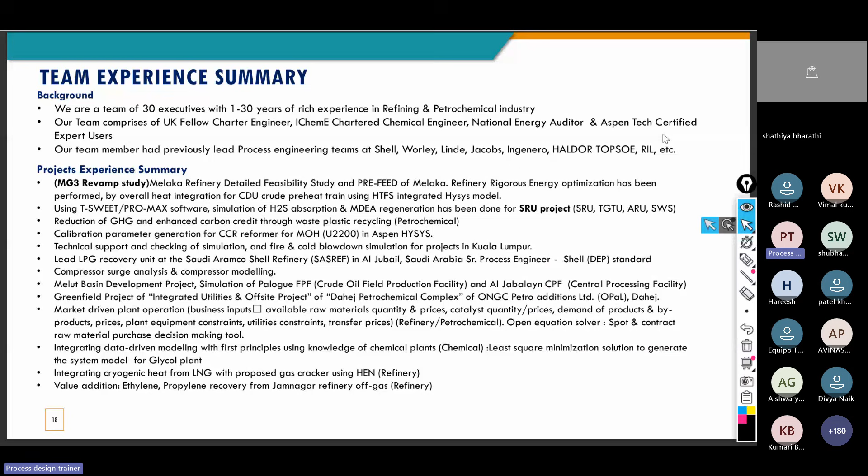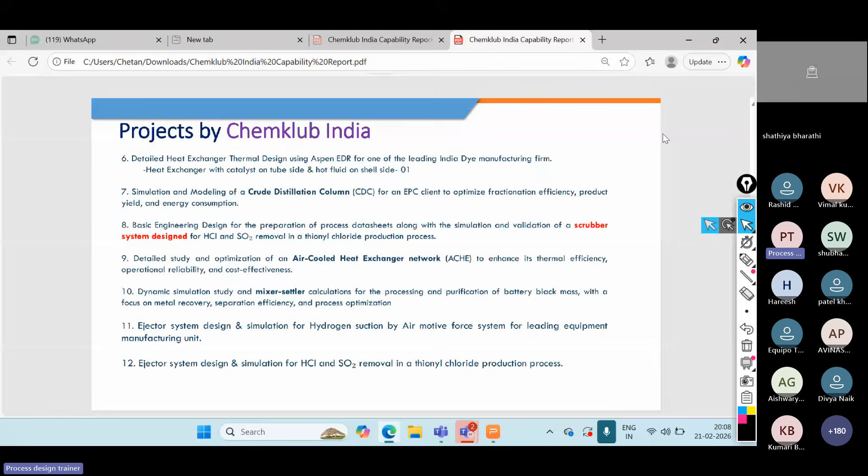Let us now start with our today's webinar, which is on pressure safety valves.

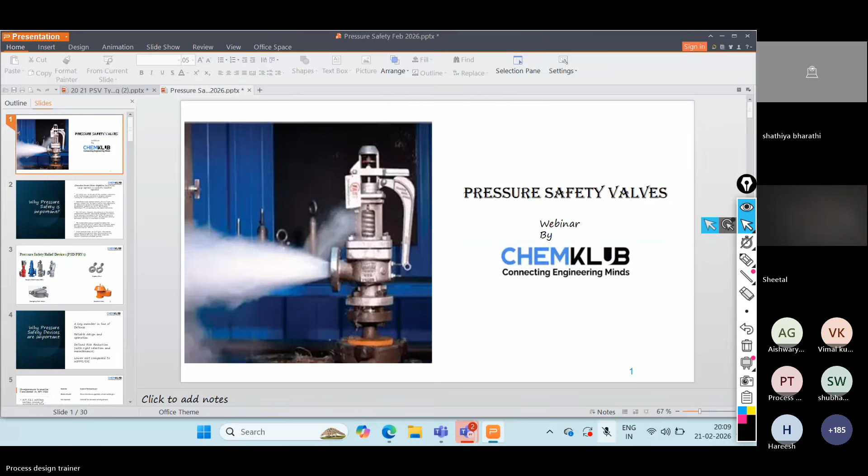Thank you. So at 2:17 p.m., the pressure set point of the batch reactor was adjusted to 12 psi. In the US they use psi; in India or Asia we use the bar system. They use the psi system. So 12 psi was the intended pressure, and the temperature set point was 300 Fahrenheit - again, it's an FPS system, foot-pound-second system. So 300 Fahrenheit was the temperature set point. This was the situation at 2:17 p.m.

At 2:39 p.m., approximately 22 minutes later, pressure in the reactor exceeded the set point, increasing beyond 12 psi, and there were attempts to reduce it - stopping the heating, providing cooling. Those attempts were made, and even so, the pressure safety valve opened at 2:54 p.m., which is 15 minutes after crossing that pressure.

We know the hierarchy of process control is: we first try to maintain temperature by means of interlocks or logic, and if it fails, then the pressure safety valve comes into picture. So at 2:54 p.m. the pressure relief valve opened. As expected, the pressure initially decreased, but after releasing some material, the pressure again started to increase. The temperature also increased, reaching 385 Fahrenheit.

So it is possible that the size of the PSV was not adequate, and that is why when it pressurized, it popped up and relieved some pressure, but it was not sufficient to release the entire pressure being generated, maybe because of uncontrolled heating. So the causes may be multiple.

We will see what are the causes of overpressure in the slides to come. But to conclude here, maybe the heating rate was so high that the PSV was undersized. There may have also been thermal decomposition leading to generation of excess gases inside the reactor, for which the PSV was not sized. So the possible cause in this case is that the PSV is undersized.

So even if you have a PSV on a reactor, it is not protected unless you have a properly sized PSV. So the focus of today's webinar is to give you some background on PSV: what the device is all about, what are its types, and a case study at the end to demonstrate how a PSV is selected. When we say selected, why we say selected and not designed, we are going to look at that in the slides to come.

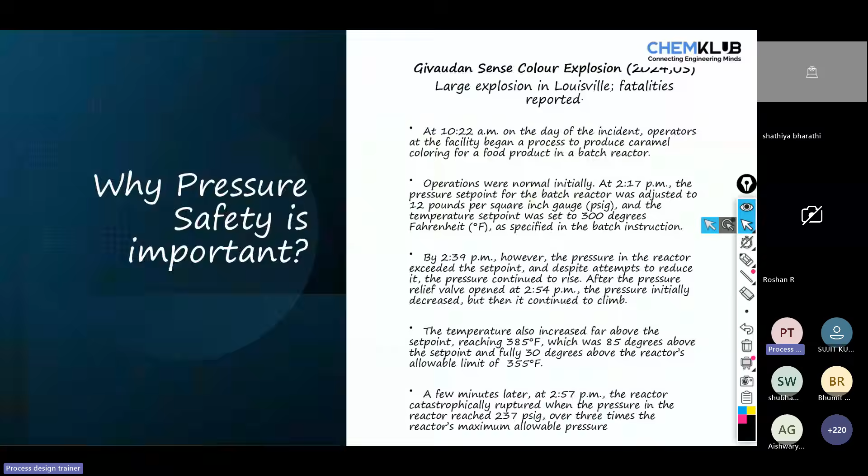A question again, we will keep this an engaging session and not a one-way communication. So another question is, what do you think is the difference between a pressure relief valve and a pressure safety valve?

Pressure relief valves relieve liquid, and pressure safety valves relieve gases and vapors. Pressure safety valves directly open, while PRVs gradually open when pressure is increased. So both points are correct: pressure relief valve is generally used for liquids, and pressure safety valve is used for gas purposes only.

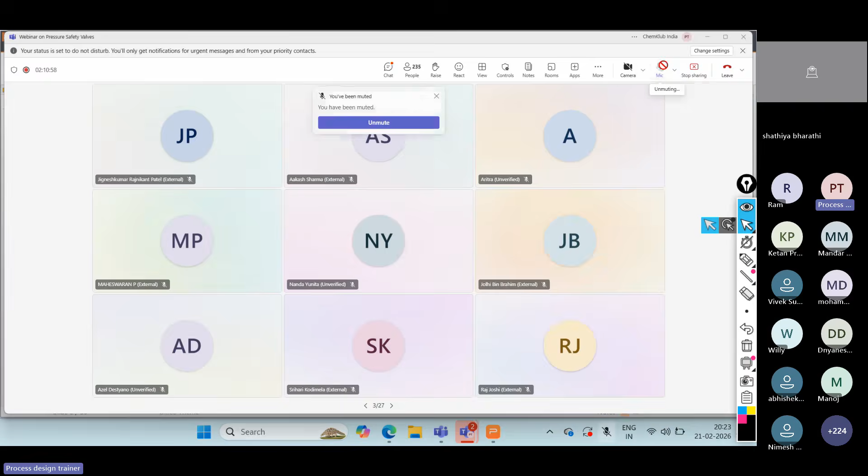You're on mute, can't hear you. Your mic is muted. Sir, your mic is off. Why does this happen? This keeps happening maybe after 10 minutes. So next time also give me the same reminder.

So I think I was talking about the difference between forward acting and reverse buckling. Forward acting rupture discs are general and used when the difference between operating and burst pressure is large, while reverse buckling is used when the operating and burst pressure are very close to each other and there can be a spike. My mic is on, right?

Yes, sir, audible. Yes, sir.

When the operating and burst pressure are quite close to each other, we use the reverse buckling disc so that spikes or pressure fluctuations do not rupture the disc, because in forward acting discs there have been many cases of premature rupture. With reverse buckling, because of its shape, it absorbs some of the shocks and does not prematurely rupture. So the point of selection is generally when operating to burst pressure ratio is more than 0.9, you go for a reverse buckling rupture disc. Otherwise, you can use forward acting.

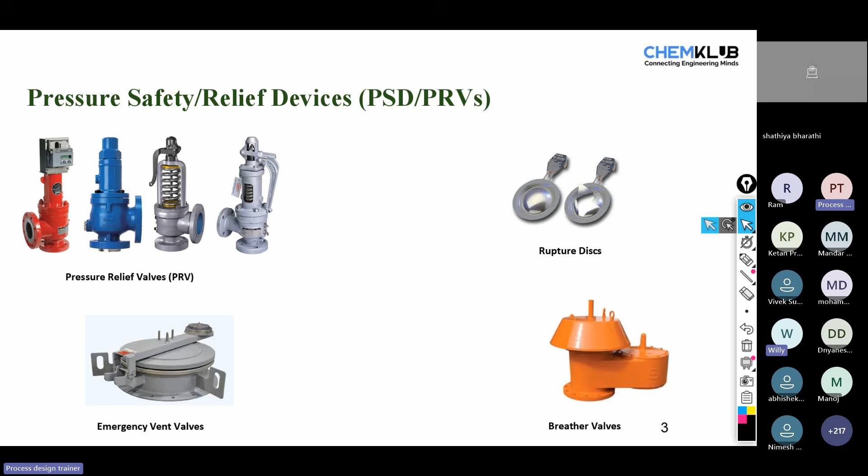Let's move ahead. Why are pressure safety devices important? As we know, there are many instances where reactors or equipment are under pressure in normal operation, or they can be subjected to pressure because of process deviations. To prevent rupture, there are a few options, like you can have an interlock or a safety relief device. These are generally the two choices.

Comparing both, if your plant is not a very hi-fi plant and you don't already have an SIS system in place, the best option is to have a PSV or a rupture disc, or a combination of both. That's why pressure safety devices are important for reducing the risk of explosion, inventory loss, and incidents. They are quite reliable.

In general, it is said that a PSV has a PFD of 1 into 10 to the power minus 2. So it is as good as a SIL 2 rated interlock, if it is selected and maintained in the expected manner. If you have a wrong selection, or do not maintain your PSV, it can malfunction and will not give you the required risk reduction.

It might lead to an incident if you have a frequent cause that causes overpressure of your system, and if your PSV does not act or the rupture disc does not burst, that might cause a big incident. That's why not only the right selection and right design, but also right maintenance and replacement are important when we talk about pressure safety devices. Their cost is lower compared to HIPPS.

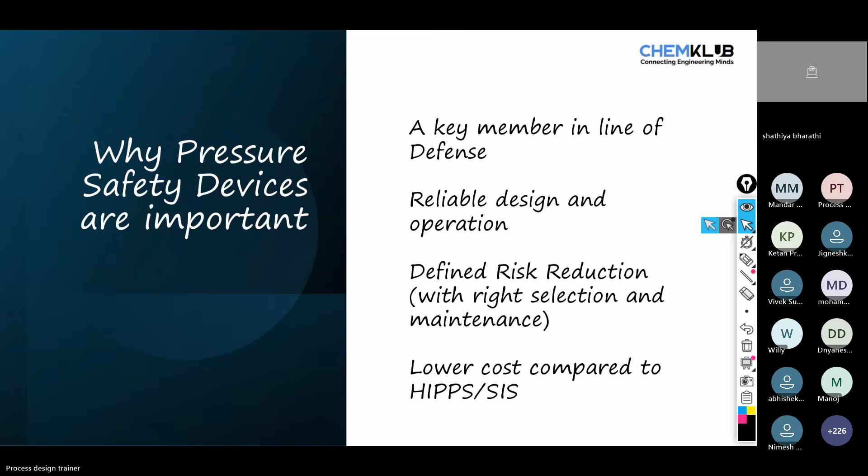Are you getting my point, sir? Hello? Hello, sir, you are not audible. I got muted again, I'm sorry.

I got your question. You want to ask that you have a system where you want to take pressure and vacuum both in different batches. In one batch, maybe it's under pressure, in another maybe under vacuum.

In that case, if you want to go only with the rupture disk, you have to talk to the vendor that this rupture disk is going to get subjected to full vacuum in some cycles. But then there are limitations from the vendor, vacuum limitations are there, meaning all rupture discs cannot operate down to 50 torr itself, they have a range, something like 600 or 500. So in that case, how do we proceed? Meaning whether we need to take two rupture discs and an isolation valve, or how it should be done.

No, taking two rupture disks is not the solution. Ideally, because you are having a system which can be subjected to pressure, you should use a PSV rather than a rupture disk, because you want to also cater for vacuum.

This is one option. Second option, if you are having the problem that PSV selection is difficult because the material is corrosive, I need a rupture disk on the upstream of the safety valve.

In the pressure case, what you can do is change your control mechanism when you are changing from pressure to vacuum. So when you are going for a vacuum process in the same reactor, you can isolate the rupture disk nozzle because you do not require it in that batch.

This admin control is okay to have. Understood - means only at the time of changing the recipe, we can have a control of the mechanical valves itself, or we can see an on-off lock valve, you can lock it.

No, an on-off valve is not the right choice, because if you have an on-off valve, due to failure of those on-off valves, your devices can go isolated in your required case also. For example, you are operating a pressure batch - if you install an on-off valve which is air operated, now it is air-to-open, and if the air to that particular valve fails, it will close and isolate your process safety devices. So that is not allowed.

You have to do it manually in that case. We are having the option of a lock valve also - a valve locking system, manual locked valves. Thank you, sir, understood.

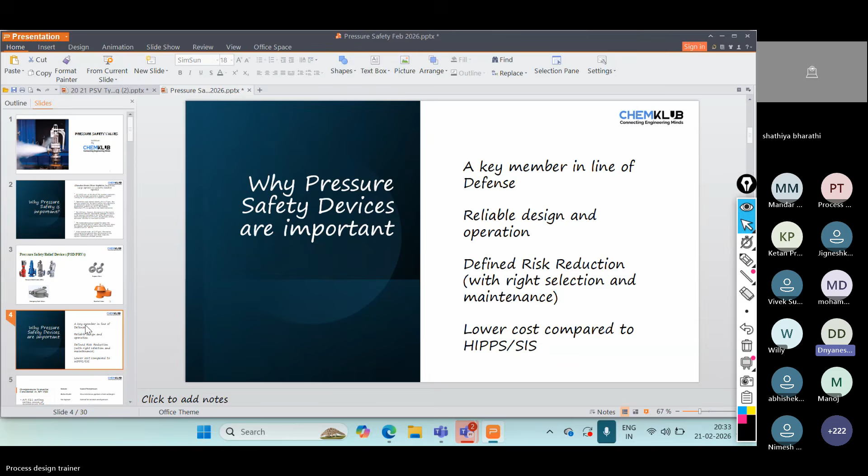Wait, now let us complete the presentation first. I will, it is just in continuation of this discussion - can we use a PVRV in this case?

So PVRV is a breather valve, right? Pressure vacuum relief valve. PVRV is a pressure vacuum relief valve, but it can in turn be connected to a nitrogen supply. I got your point.

But in this case, in my opinion, because he is already having a PSV, there is a requirement of a PSV at a higher pressure, right? So PVRV you cannot operate at 2 bar, 3 bar - it is in millibars, because it's a weight loading type mechanism.

PVRV can be used in a vacuum situation. In a pressurized situation, we have a PSV set at a certain pressure. But he wants to pull just vacuum inside the system. When he pulls vacuum, there will be air ingress from the vent port on the vacuum side. He wants the vacuum inside the system, but he also wants the rupture disk, which is not suited for vacuum.

If you provide a PVRV, it will lift itself and allow air or nitrogen ingress inside, so he will not be able to pull the vacuum.

Just for information, we are using one torr vacuum in our plant and we are also using a rupture disk, but that rupture disk doesn't buckle up. There are suppliers who supply reverse buckling type rupture disks rated for full vacuum, but in his case maybe the MOC is such that, for example, you must be using a metallic rupture disc. Some rupture discs are made of graphite, so they are also not rated for full vacuum. We are using PFA coated discs.

If the PPT is shared, we are not able to see it. I'm sharing it, nobody is able to see it. It is visible, sir. Yeah, I can see it. It may be the internet connectivity, try to reconnect.

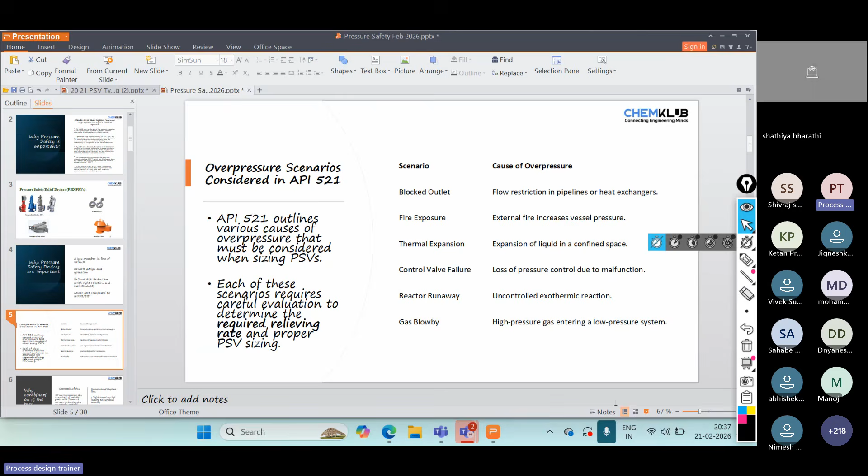So what to do when you have multiple scenarios? For example, for sizing a PSV, you have blocked outlet as well as fire exposure. This is a very common case where you can have both scenarios at the same time. So what will you do when you want to select a PSV suitable for blocked outlet as well as fire exposure?

What is the procedure or criteria for selection? Need to check which relief load is high, that one you select. In that case the orifice size is higher. Orifice size depends on the relieving rate. Relief load is relieving rate, right.

That's the right answer. Why? Because you can have different relieving rates at different pressures and different densities. In blocked outlet you might have a different density because the temperature is normal, but in fire case you might have a different density because it is under high temperature. So relieving rate is the right criteria, because for the same orifice size you might get different relieving rates based on different densities of the fluid, even though the set pressure is the same. So relieving rate is the criteria.

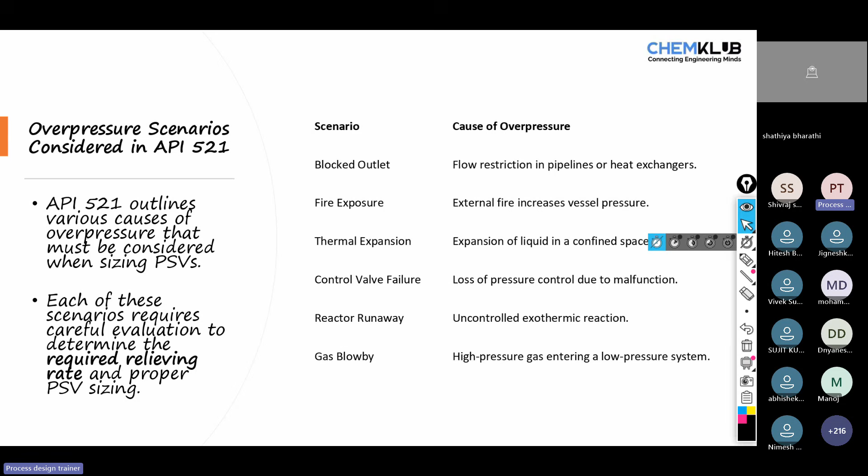Whenever you are choosing a safety valve, first you have to make sure that you have considered all the possible scenarios out of this list. And for the worst case relieving rate, you will select your pressure relief device, either rupture disc or PSV, or a combination of them.

Why is combination the best choice? There are certain drawbacks of PSV. PSVs come in direct contact with your process fluids. They are prone to corrosion due to contact of metallic parts with chemicals. They are prone to choking because it's a complex structure inside. They leak due to repeated working and erosion of soft seats.

So in case of toxic services, if they operate multiple times, you might have a situation that on the outlet side you have a small stream of material coming continuously. I have seen it in case of steam - you might also see in the plant that the PSV outlet is always releasing some steam because it's kind of leaked due to periodic strain on the parts. It is also costly if constructed from special materials - if you want to make it Hastelloy or alloy 20, it will be a very high cost. Am I audible?

Yes, yes, perfect sir. Yes, yes. Yes sir. Okay. Yes, yes, yes sir. Yes. Yes, you are. Okay.

So these are the drawbacks of PSV, but does the rupture disk take care of all the drawbacks? No. When the rupture disk opens, the worst part is it de-inventorizes everything. So if you have, say, an ammonia storage or ammonia reactor under pressure, autoclave with high pressure, big inventory - if the rupture disk is the sole pressure relief device and it ruptures and opens, the entire ammonia inside the reactor will be released to the atmosphere, causing toxic exposure to a lot of people in the surrounding area. It will be an offsite emergency. You do not want your chemical released to atmosphere. Even in many cases the material is costly, so it is also an economical loss for the organization.

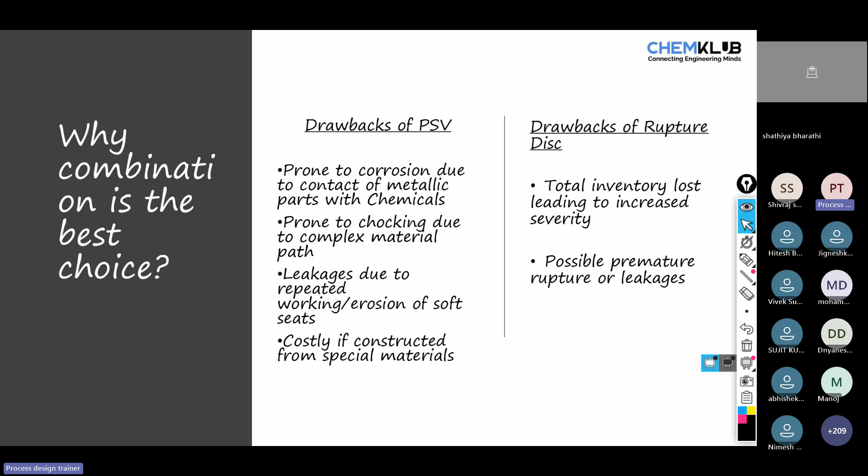The second advantage is you can use a pressure safety valve which is not very costly, because the rupture disk will prevent corrosive material from entering the PSV for a long period of time, and whenever there is a requirement, the rupture disk breaks only for that short period of time. The PSV will be exposed to those chemicals, but in that very short time it is not expected to get corroded and malfunction. This is the reason in many cases you must have seen a rupture disk followed by a PSV as a combination - they give the advantages of both equipments while discounting the disadvantages of both of them.

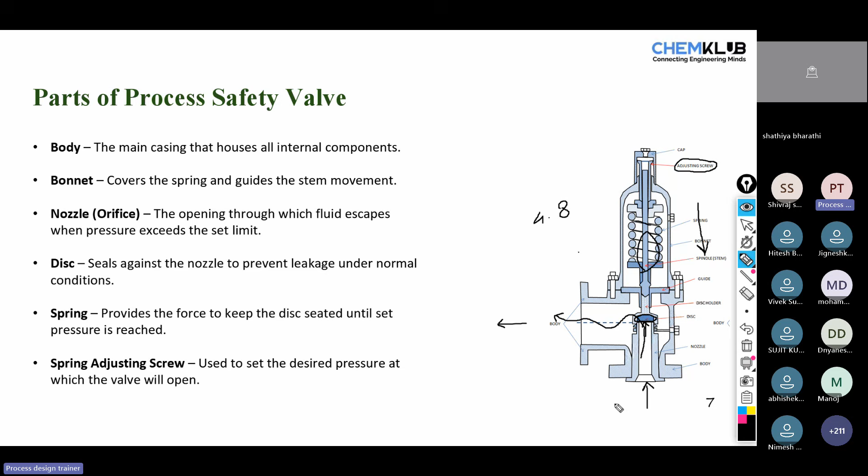So this is basically your overall construction of a pressure relief valve. Can somebody tell me which type this one is? Conventional PSV without bellows. Yeah, so this is a conventional PSV.

So what are the other two types? Pilot balance type and bellows based type. One is conventional, balance bellows, and pilot operated. Okay, so I will not go into this description totally.

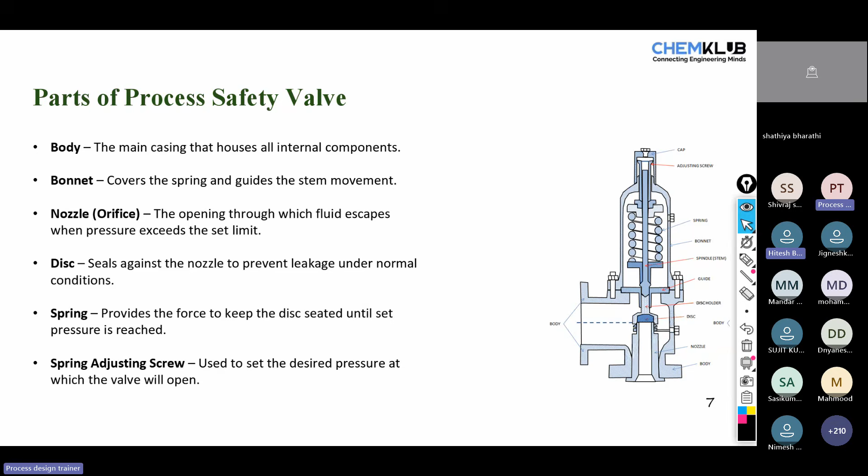Okay, what is the difference in the construction? The bellows are seated in the disc area to increase the back pressure tolerance. In conventional, the bellows are not provided. In bellows type PSVs, the bellows are provided for absorbing the pressure. And in pilot operated, a separate pilot is provided through which the internal pressure is absorbed, and through the system's pressure the PSV pilot operates, and after that the PSV moves into position according to the set point.

Okay, let us quickly go through this. I think most of you have told it correctly, but for those who do not know at all, let me go through it. So this is a conventional relief valve. You can see this is a nozzle and this is a disc set against it by means of this pressure. So when this PSV lifts, this bonnet - this is called the bonnet, where the spring is located - floods with the process fluid. Imagine this as a hollow cylinder in which you have a spring and a piece attached to it with a soft seat against the nozzle.

What happens when this lifts up? This has a smaller dimension compared to the bonnet - you can see the diameter is smaller compared to this diameter. So when this lifts, the process fluid enters this area. It also enters the bonnet, and it comes out from this outlet.

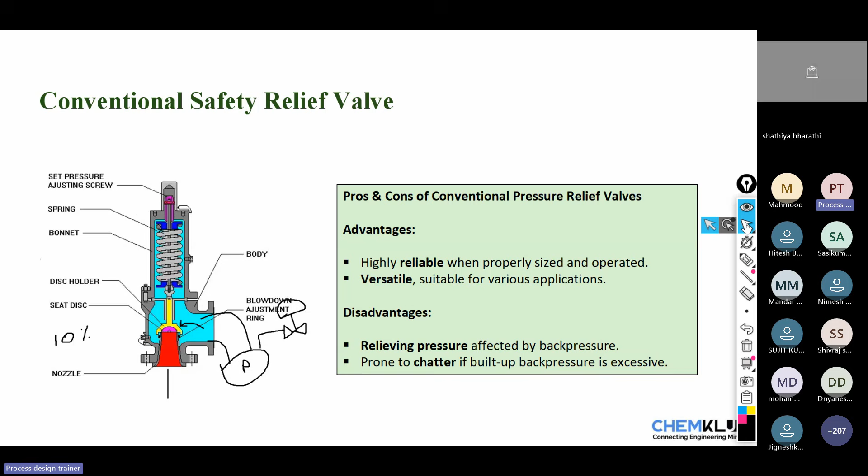Okay, okay, understood, thank you. I'm not sure why I'm not able to go ahead. Some problem with my system.

So the next type is balanced bellow. In balanced bellow, the relieving pressure is not affected by the back pressure. They can handle higher back pressure because there is a back pressure from the outlet side, but these bellows do not allow that entire back pressure to act on the seat. These bellows form a wall which prevents the outlet side from putting pressure directly on the seat, and that is why, up to a certain back pressure higher than conventional, they are allowed.

They also prevent the spring from corrosion. In conventional valves, when the process fluid enters, it goes all the way into the spring and then comes out, so these springs are exposed to the process fluid. In the balanced bellow type, they are not exposed because there is a diaphragm and a bellow which prevents direct contact of corrosive liquids or gases with the spring.

Now, question to all of you: there is a difference in construction at a point between this balanced bellow and the conventional one. What is that point of difference? Sir, I think we can't adjust the set pressure below it... we talked about the bellow, so that is the obvious difference from the name.

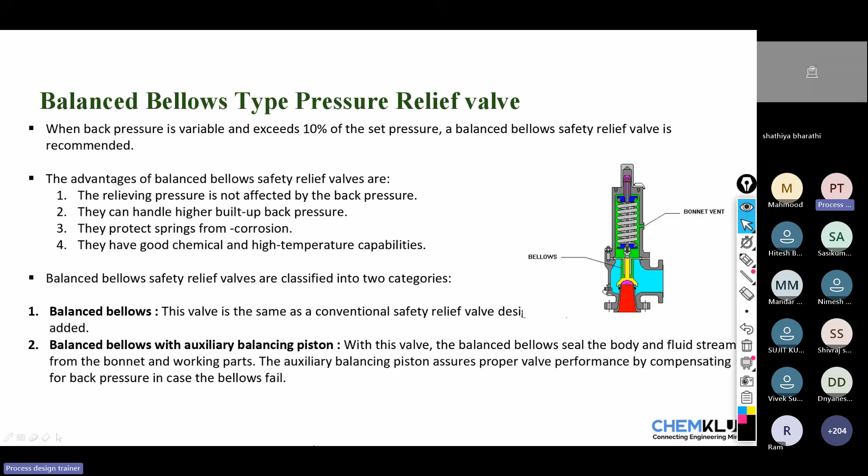My presentation is not working fine today. I'm not sure why. Yes, the balanced bellows... Sir, it's not visible. I'm not visible? Visible, sir. No, visible. Chat is visible. Yes, visible, visible. Okay, so if it's not visible for somebody, he might have to change his internet connection again. Okay, so what about this pilot operated type? Somebody tried to explain it quite well.

This is a version where you can have up to 100% back pressure - whatever is your set pressure, an equal back pressure also you can have. Why is it so? Because it is not dependent upon the spring or the cavity or anything like that.

So what it does is have a tube, called the pilot tube. This is your main PSV, you can see my cursor, right? This is the main PSV, and you have a tube coming out from here which is a pilot tube, and this is a control pilot, and then you have a tube going back here.

Considering this side is always pressurized, this pilot is fed with this pressure always, right? So this control pilot has a mechanism where it gets the supply of process fluid all the time. It compares it with the set pressure. Whenever the set pressure is reached, it actually vents the process fluid from here.

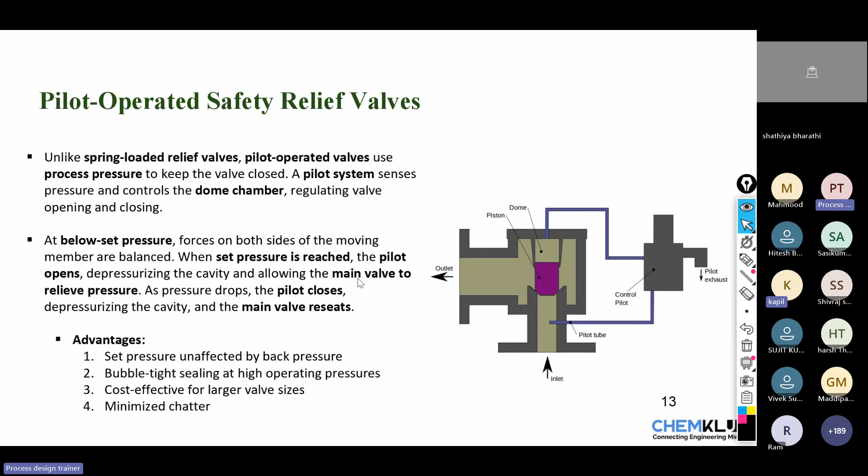Sir, the line connecting the pilot and PSV has a small size. So even if there is a small fluctuation, will the PSV pop up? No, there is no possibility of increased pressure even though the size is small. See, if you have a pressurized system and even if you take out a small pipe out of it, your pressure remains the same regardless of the size of the pipe. So that is not going to change. And the pilot is getting the pressure from the PSV only, where it is connected. It is getting the signal from PSV. There is no additional supply of air or nitrogen to actuate it. Okay, it is getting that signal only.

Okay, so let us go to a case study wherein we will see how your back pressure changes your design. This is an example, and this is an example from a refinery. It is also there in API. So you can also refer to the example when you want. If you go to API, there are calculations given.

So in this case, the hydrocarbon vapor flow rate in case of an operational upset has been given as 53,500 pounds per hour, which is 24,270 kgs per hour. And the case is blocked outlet. So it has been given that this much load will be there on the PSV. The hydrocarbon vapor is a 50-50 mixture of butane and propane, and the molecular weight is 51. So this we will use as data in the calculation. The relieving temperature is 627 Rankine, 167 Fahrenheit, and 348 Kelvin. The units are different, the value is the same.

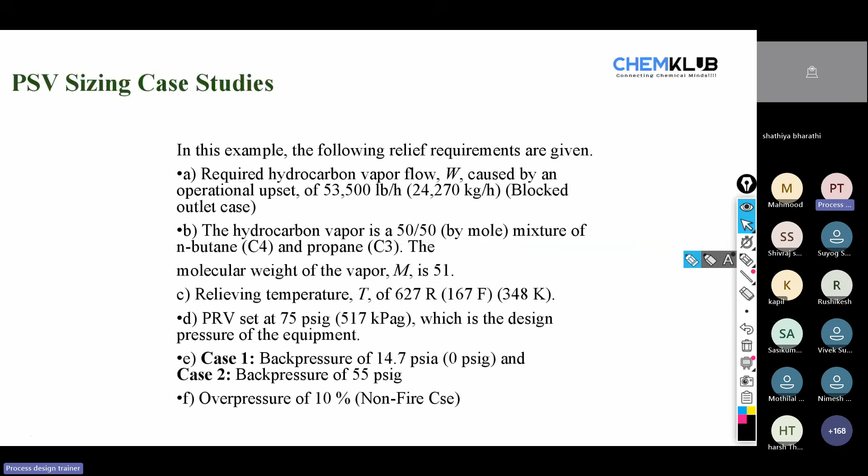So for checking flow regime, we have to compare it with the set pressure or relieving pressure.

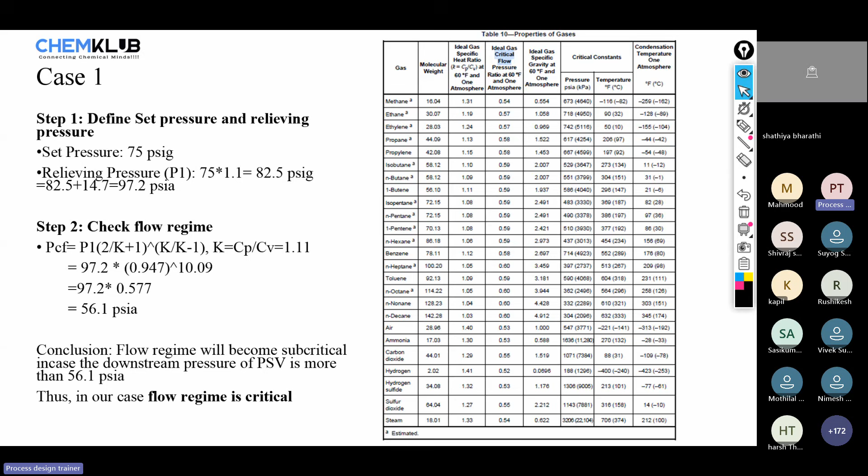This is your critical flow pressure that we are referring to here. This is the table in API, table 10. So for your gas, you can see what is the critical flow pressure, which for our case is 56.9 psi absolute. Cp by Cv we discussed about, and in the table there is the value for C also available, which is 328.

Once you go through your API 521, you have all these equations for you. You see this equation 6, you can see only alphabets here: C, KD, P1, KB, KC, T, Z, M. You will come to know all the parameters when you go through. T is temperature, Z is compressibility factor, M is molecular weight, W is your relieving rate.

Then you have this C, which is the coefficient which you can calculate by this equation. K is the ratio of Cp by Cv. Then you have P1, KB. KB is your back pressure, and capacity correction due to back pressure.

This is KB. As we do not have any back pressure, we will consider it as 1. If we have some back pressure, you have to correct, you have to take this factor of KB. There is a graph available. So when you have a back pressure, you have to calculate KB also.

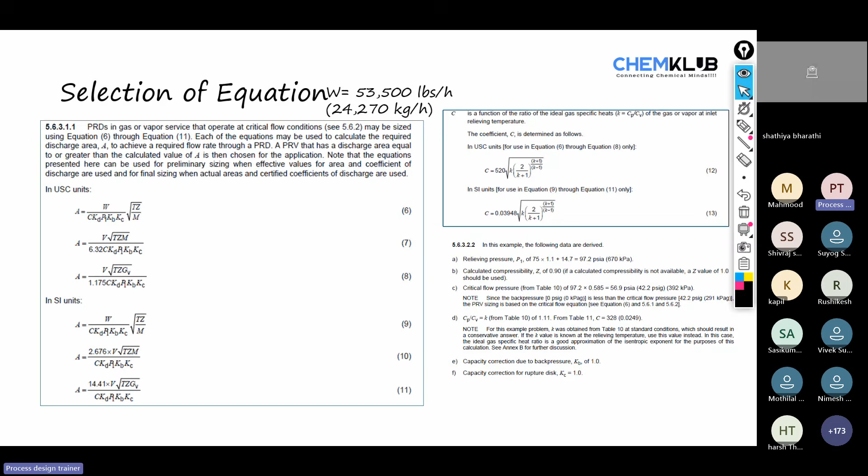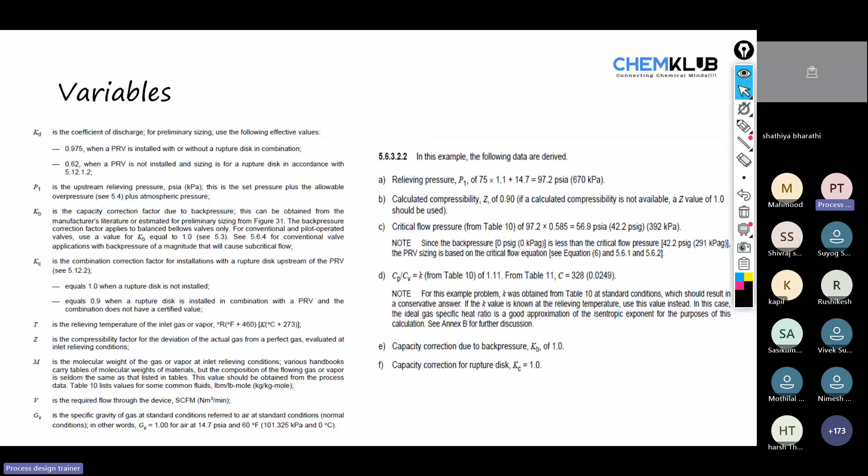Let us go to the calculation now. We have put our required mass flow rate from the case and other factors in here. We are not going to do the calculation here, we just want to take the inference of what happens when you have a back pressure and when you do not have a back pressure. So for case 1, when the back pressure was 0, we got an area of 5.73 square inch, or 3698 mm square. We will go with inch square for simplicity. So 5.73 inch square for the load of 53,500 butane and without any back pressure.

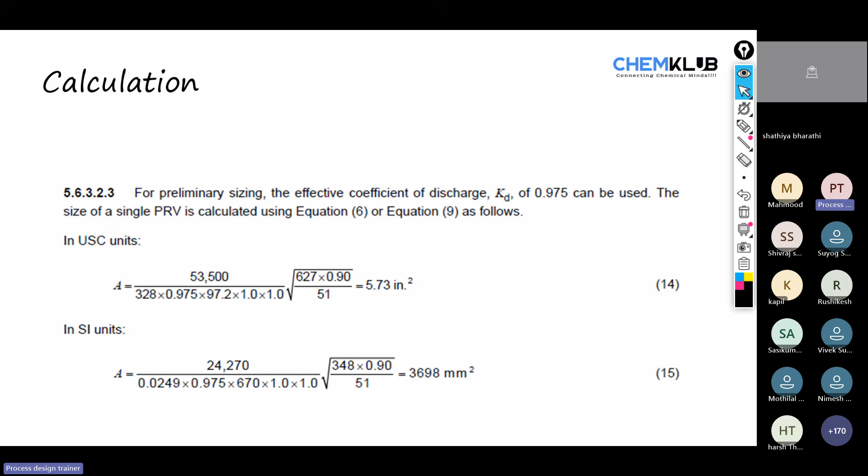So PSV, you can see here, it is denoted by means of a letter, because there are multiple manufacturers who will produce PSV and they can produce it in different ways. So what they have to do is assign a letter to their PSV stating that my PSV provides this much orifice area, and the area provided by the PSV should be more than the type which is assigned to it. For example, any PSV with type D should have an actual orifice area, or effective orifice area, more than 0.11 inch square.

So for our case we want 5.73. If we go down this list, we find for type N we have 4.33, which is not suitable because it is lower than our required size. For type P, we have 6.38, which is higher than our required size. So as we required 5.73 inch square, type P, providing 6.3, is our selected type. So for case 1, when we do not have any back pressure, we have selected type P, which is 6.3.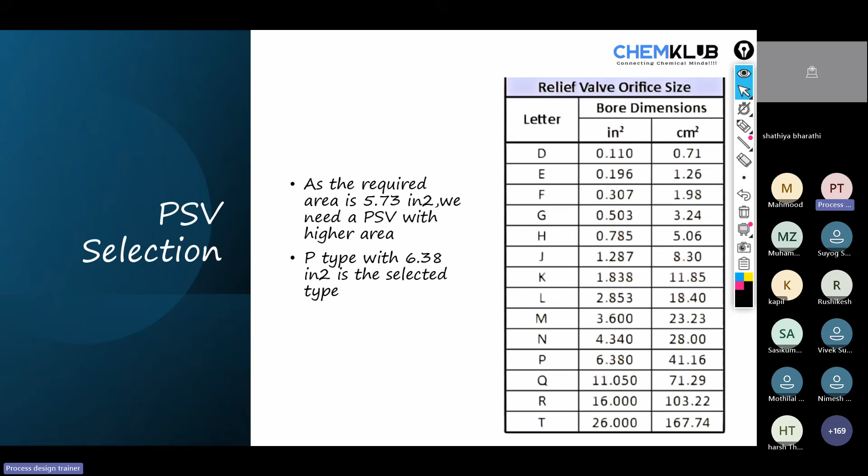So it's P 6.38. Now let us go to case 2. In case 2, we had a back pressure of 55 psi. We calculated the back pressure, as we were given the back pressure as 55 psig.

We again checked the flow regime. We found out that the critical flow pressure is 41.38 psig, which is less than 55. So as the back pressure is higher than the critical back pressure, the flow is now subcritical. So now we have got the answer to the question.

If the back pressure is higher, our flow regime goes from critical to subcritical. We are still yet to find out whether the size goes up or down, but we have now concluded that because there is a higher back pressure, the flow will not be critical. So flow will be slower, not as high as it was in case 1 when there was no back pressure.

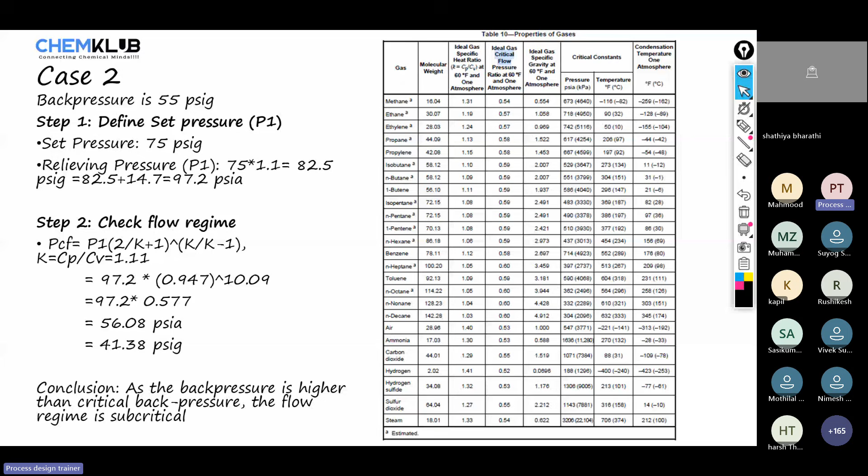It is obvious, because you have some pressure in one direction, and in the opposite direction you have some pressure, so the net flow differential pressure will be less, so your net flow will be less. So net flow is less, meaning the flow is not reaching critical flow and it is a subcritical regime.

We have to find a factor called P2 by P1, which is for calculation of F2, because you have this F2 as a factor for calculating the size of your PSV. So you have a graph here. It is also there in your API.

So what the graph is about: you have to find P2 by P1. What is your P2? Your P2 is your back pressure and P1 is your relieving pressure. So you found out P2, you found out total back pressure as 77.2 and the P1 is 97.2, and the ratio of P2 by P1 is 0.794.

Now you map it, 0.79, on this graph, and this is for different values of K. So for our value of K, when you plot P2 by P1 in this graph, you find F2 as 0.86, somewhere here. So this is our F2. You can also use calculation, putting values of K and R to find it out, but generally the graph is the easy method.

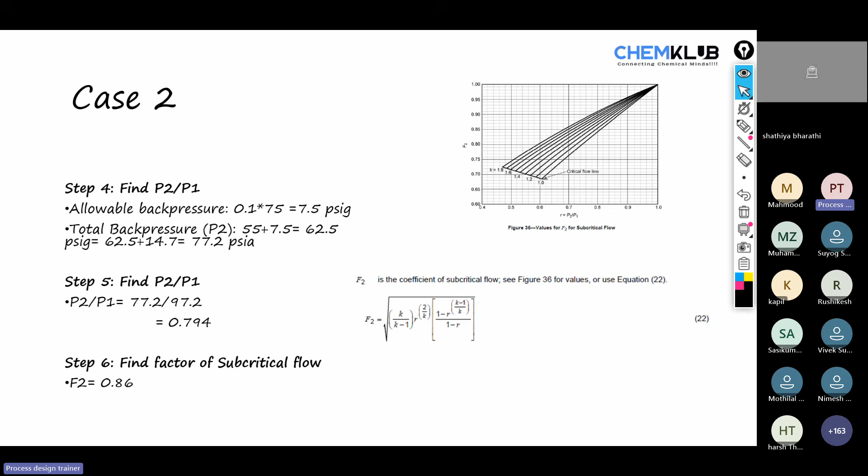Okay, we were comparing it, no? So we wanted to check whether the PSV size changes. Understood, 55 is something which we considered.

Now, as the flow has changed from critical to subcritical, the equation also changes slightly. You can see that this factor has changed; F2 is included here. Now we put in again all the values, and we find out our answer: the required area is now 6.55 square inch.

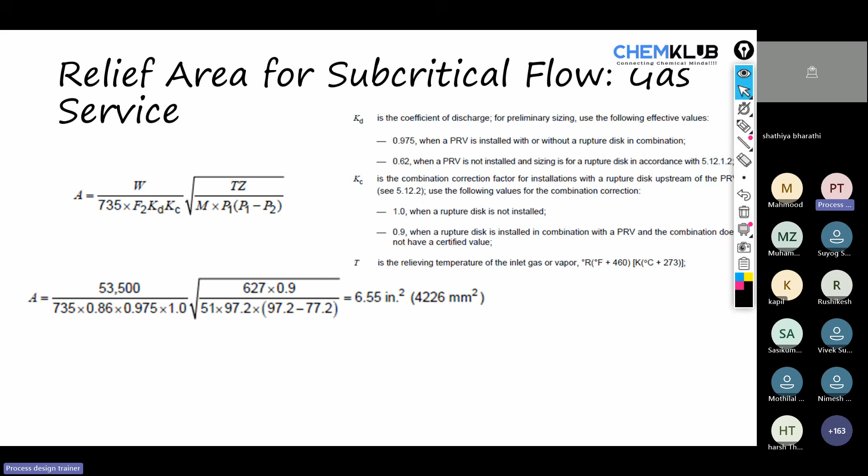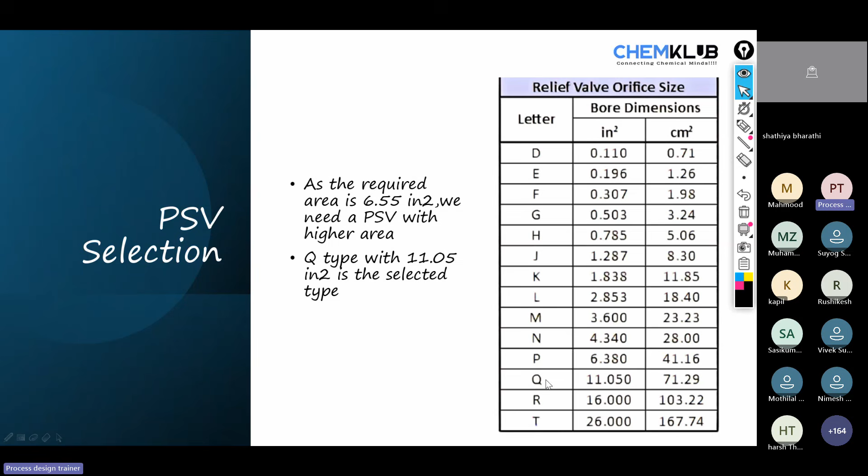Now 6.55 is more than P, so the next available size is Q. You cannot select a PSV having area less than your required area even by a fraction. So your required area is 6.55 inch square, so you need to select Q.

11.05 inch square. So what's the conclusion? The conclusion is the information about the back pressure on PSV is critical in sizing calculation. There is an increase in the required size of the PSV for the same mass flow rate because of the increase in back pressure.

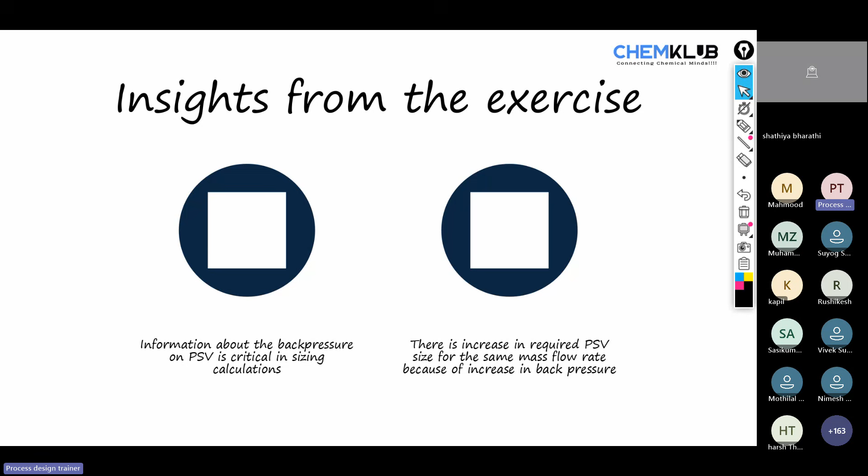I have seen many cases where you all are responsible at some point for procurement of PSV from a vendor, because no chemical industry manufactures its own PSVs. So whenever you are filling up the data sheet, sometimes people make a mistake that back pressure is zero. You need to go and see where this is going to get installed, how much piping is going to run from the outlet, where it is going to get connected - is it in the catch pot, is it in some dipped condition under some water head - and you have to provide accurate back pressure to the vendor. Only then will your PSV be sized correctly. If you miss those points, you will end up with an undersized PSV.

So that was our insight from this session - if you do not have properly identified back pressure scenarios, you might actually undersize PSVs.

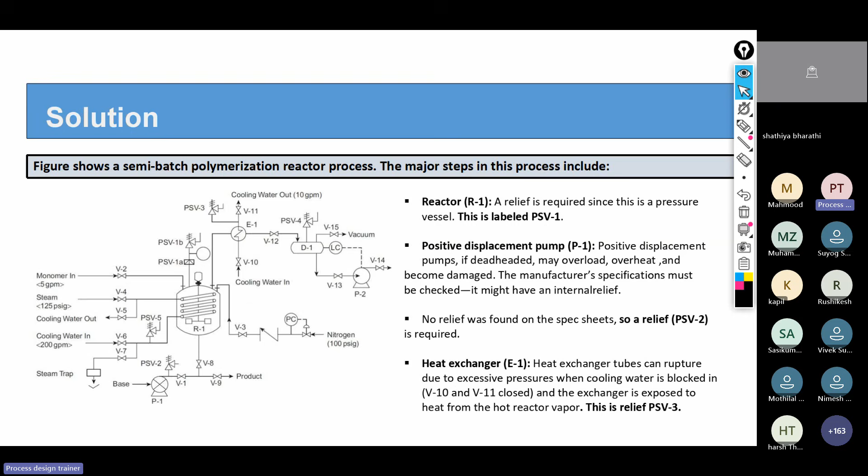Okay, is there any question till now? Yeah, go ahead. Hello, can you hear me? One by one, yeah sir. Let the girl ask first, she was the first to ask. Shathiya, okay, please go ahead.

So I have a question - we just looked into case one and case two, right, and we selected the type of PSV, either type P or Q. So my question is, what will be the drawback if by any chance we select one size higher?

It's quite a common question. Let us see whether somebody would like to answer before me - what can happen, if I can, please.

Yeah, please go ahead. So oversized PSV would cause chattering. Chattering is, I think, the most foreseen problem in PSVs. If my PSV size is larger than my relief loads, there would be peaks of pressure. Overpressure would happen, my PSV will open, and then I will be relieving some process media to flare, and again this PSV will close. Again there will be back pressure, and this cycle will go on. This is not recommended in the process industry, as it can hamper the mechanical parts of the PSV. So I think chattering is the first reason that an oversized PSV should be avoided.

Yes, that's absolutely spot on. Because pressure safety valves act on differential pressures, if you have a very big PSV, it will suddenly release all the pressure. It will cause the pressure to go down below the set pressure very quickly, and then again there will be some buildup, and again there will be pressurization, and this can happen in cycles of seconds, and that will cause very rapid movement. Even sometimes the integrity of the PSV is lost. Sometimes the shock or vibration is so high that the piping also ruptures or the gasket leaks.